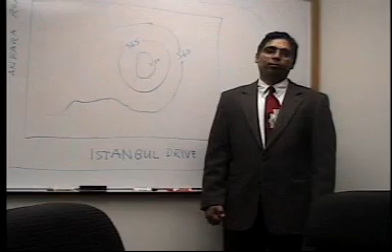Mustafa and myself, we work here at Winkelmann and Associates. The type of work we do here is called land development or general civil engineering. From the name, you can get an idea what kind of work we do. Land development means we develop a land from its existing condition to a desired condition.

The existing condition may be a farmland, a ranch, or an agricultural land, and we transfer this land to the desired condition—meaning the way you want to change it, maybe for housing, a retail store, or a big mall, whatever it is. General civil engineering means all branches of civil engineering are involved here, like transportation engineering, water resource and hydrology, soil and foundation, environmental engineering, and a little bit of structural engineering.

So I'll give you an example of the way we do the work here. There are two steps: one is engineering and one is legal. The legal part involves all the city permissions and permits from the city and TxDOT, which means Texas Department of Transportation, and others. For today's presentation, because it's such a short period of time, I'll cover only the engineering part, and moreover, only for single family. Sometime later, I wish I could explain the others to you.

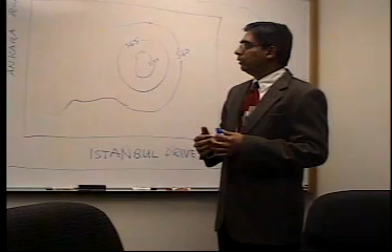And this is the existing contours, which shows 570, 65, and 60—that means there's a little bit high here and it's going down. There's street to street and there's a creek behind this property. It's a very simple property; I'm just using this as an example.

In my presentation, it's not very formal—it's more of an informal style. And if you have any question, Mustafa is with you, so you can ask him and he can explain a little bit more if you don't understand anything.

First of all, what we do—I'll put a very easy, very simple layout. This is a street, so we put a street. Say we put a street here, something like that. It has a two-point exit, and then subdivide it like this.

That means this is one person's, one person's, one person's, and one person's lot. This is his lot. We divided this whole land into 1, 2, 3, 4, 5, 6, 7, 8, 9, 10, 11, 12, 13. So there was one property, now there are 13 properties.

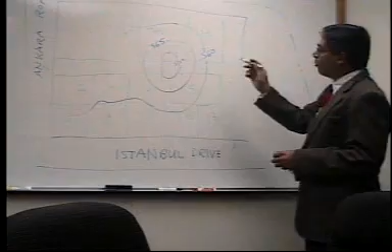So we need to design the street first, because in land development, the street is the backbone of the whole thing. If you cut a cross section from here, the cross section will look like this: this is 70, this is 70, and this is going down. This is the existing ground line. So we design it in such a way.

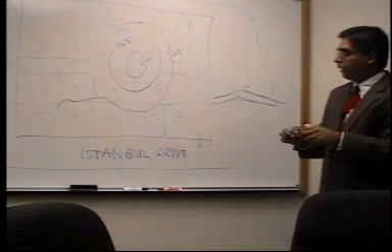We designed the street in such a way that it will cut the existing ground and put the dirt from the street to the pad, so the pad will be a little bit higher. The reason is, for drainage, we want all the water from the pad to go to the street—pad to street, pad to street—so that the street will work as a channel to convey the water eventually to either the creek or some other existing storm line. The storm and sanitary are two different systems. Both pipes carry water, but one carries storm water and one carries sanitary water.

So we profile it in such a way—it's called geometric design of this road. So I told you all the branches of civil engineering are involved; there's a transportation part, and we designed this.

So now from this street grade, the proposed grade, we put our spot elevations here, here, here, everywhere. Then from this street we put this spot elevation, meaning the elevation from the proposed grade, and we do the lot grading.

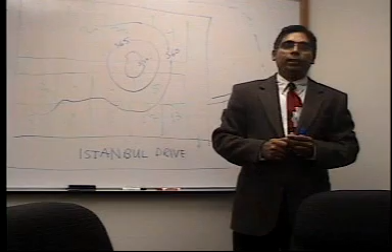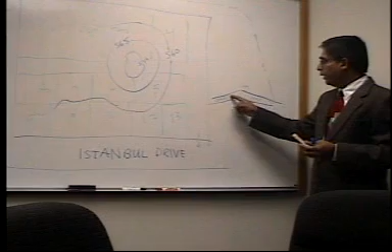What's the maximum grade we can design for the street, and the minimum slope? Very good question. Here in Dallas, we use minimum 0.5% and maximum 10%. But normally 10% is very steep, so we don't try to use that. Normally we use 2 to 3% slope, because if it's too steep it's not convenient for drivers, and if the slope is too little, water will not drain. So we keep it less than 10% and more than 0.5%.

So after profiling, we go for lot grading. Mustafa will explain lot grading in detail later, because I don't want to go too far into it right now. I'll just explain the overall idea.

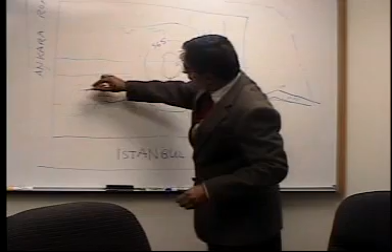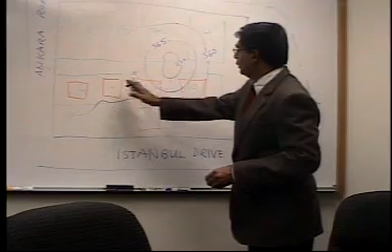This is a lot, but nobody can build a house in the whole lot. There is a setback area called the pad. The pad means the area of the lot where people can build a house, because they need a front setback, side setback, and back setback. I told you before I'm only covering single family detached residential houses, not townhomes or multifamily apartments or multi-story houses today. I'm just covering single family.

So this is a pad. We design the elevation from the pad based on the street grade - we know this elevation, this elevation, this elevation. We design it so that this person's water will not go to that person's lot, and we want to drain everything to the street.

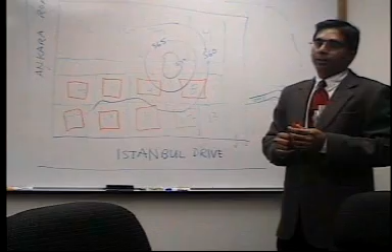You mean storm water? Yes, I'm talking about storm water first. After 10-15 minutes on storm water, I'll go to drinking water and sanitary water. This is all about storm water because we spend most of our time on storm water design. The reason we don't spend much time on the sanitary and water systems, I'll explain, but the storm water will flow here, here, here, here.

Then how does this water get carried to the street? Because if we cut a cross section of the street - I'm talking about concrete street or rigid pavement - that means it has a curb. There are two types of street: one is rigid and one is flexible. I'm talking about the rigid pavement, the concrete street.

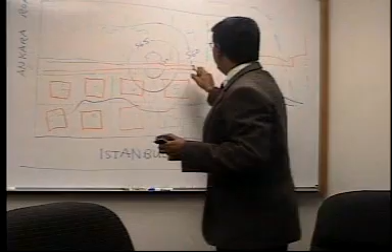This is your pavement, and this is your right of way. Mustafa will explain what right of way means here. This is your right of way, and this is your pavement. So water will come to the pavement and will be carried within this area.

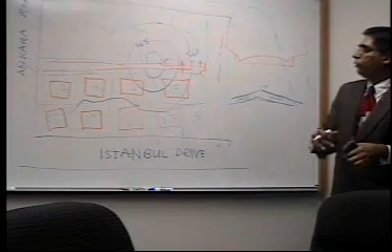Then, when the capacity of the street exceeds its limit, we need to put an inlet. Inlet means these little inlets we'll put in. We'll put inlets and carry the pipe. Inlets will carry the pipe like this, and we can drain to the creek.

So water will come from the house to the street, will be carried through the inlets, and there's a storm pipe which goes to the creek. How to design the inlet and the whole pipe system - I'll give you very short information because I cannot explain it fully, it's very big and vast.

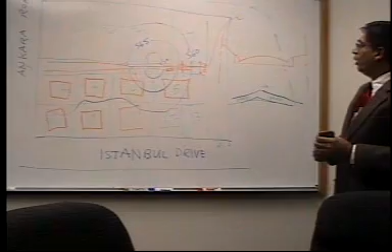There are a couple of ways to calculate the size of the inlet. Inlets can be 5 foot, 6 foot, 8 foot, or 10 foot wide. The opening of the inlet looks like this - if you see it from this view, there's the opening, a 6-inch opening, and this is your curb. That's the street, and the water will go here.

Mustafa can explain the details of what the inlet is. You can explain, Mustafa - or you can show them pictures.

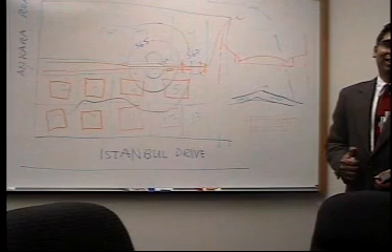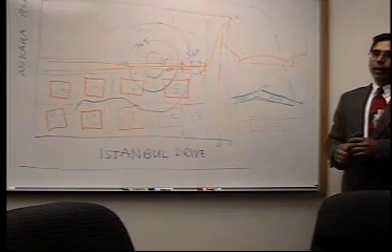So the water will go there and into the inlets. The inlet is connected to the pipe. This pipe runs and carries the water. How can you calculate the inlet size? A couple of ways - there's a nomograph. You can calculate it based on the slope of the street, since it depends on the slope of the street.

The size of the inlet depends on the slope of the street. If it's a very steep slope, then very little water will go to the inlet—most of the water will flow over the street. So one way you can calculate the inlet size is

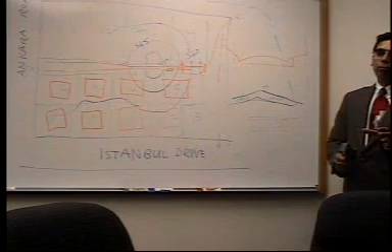through the nomograph. Number two, you can use some equations. That is, if the slope of the street is this, then for per CFS of water—CFS means cubic feet per second—you have to use that size of the inlet.

And for the pipe, we use the Manning's equation, which is one of the equations we use most. I think you all know Manning's equation: Q equals 1.486 over N, A, R to the 2/3, S to the half. That is the Q.

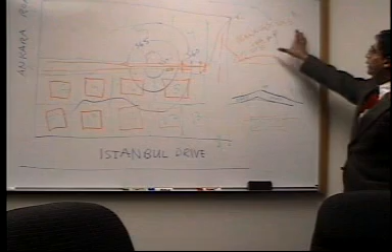Q means the discharge. We use a couple of software packages to calculate all of this, but all of the software depends on this equation. N is the Manning's coefficient, A is the area of the pipe, R is the hydraulic radius, and S is the slope of the pipe. We use this for open channel and for pipe systems both.

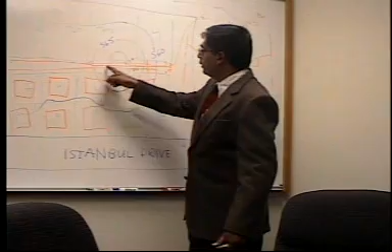So with this equation, we calculate the size of the pipe—how much Q is coming here. Say 5 CFS of water is coming here, then 10 CFS is here, so 15 CFS is coming here.

Now I'll go a little bit into the pipe design. So what we'll do here—say this point is called the head wall, that means the exit point, and this is your pipe, that is your inlet. This inlet is somewhere else here. So from this inlet 5 CFS of water is coming, and here is 15 CFS.

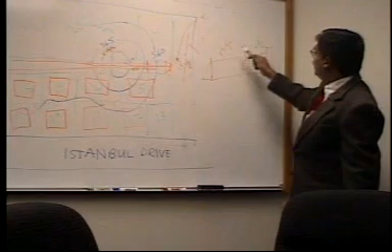And the main thing in designing the pipe is backflow analysis—that is very, very important. Water from the creek should not come out through the inlet. That means we have to do backflow analysis every time. The most important thing in sizing is doing backflow analysis so that water will not come out from the inlets. How we do that—I'll give you a little idea—is using the 100-year flood.

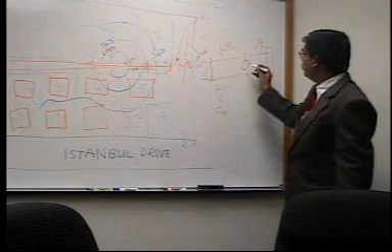What is the 100-year flood elevation? We know, say, 550. So again, from the Manning's equation, if we know the Q, we know the velocity and the slope of the hydraulic grade line. So we start from the 100-year flood here, then we go along this length with this slope, we get this hydraulic grade line, and then there's a jump because the velocity is more than here.

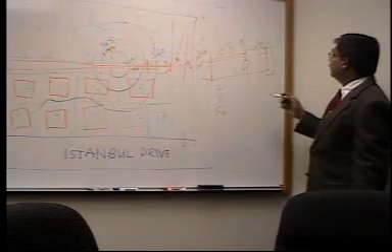So we plot the hydraulic grade line from this point to this, then this, then this. But this hydraulic grade line cannot be more than—it should be 2 feet below the existing pavement or top of curb. Otherwise, water will come out from the inlet and come to the street, and eventually it goes to the bed.

Again, I'm telling you, it's a very short time—I just gave a little bit of idea about that. Is there anything else, Mustafa, I need to tell?

What's the maximum slope and minimum slope for the pipe? Okay, very good question.

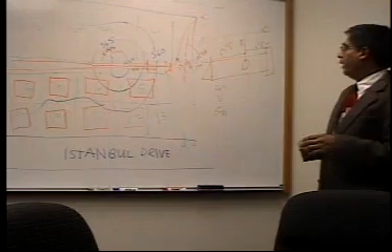It depends on the size of the pipe. If you have a very big size pipe—the minimum size of pipe we use here is 18-inch RCP. 18-inch RCP is reinforced concrete pipe, and maximum we use here in our office, as common practice, is 66-inch RCP. Then we go to the box—box means concrete box, a big box, it can be 10 by 10, whatever the size.

So the bigger your pipe size, the less slope you can use. You can even go sometimes to 0.02%, maybe 0.1%. For an 18-inch pipe, I will not use less than 0.5% slope.

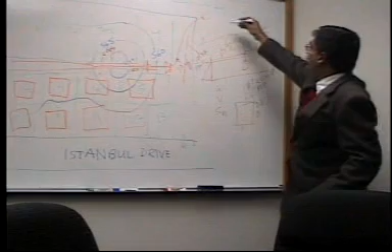But if it's partial flow, only in that case is slope an issue. If you are in a full flow condition, that means your pipe is under pressure—in that case, your slope doesn't matter because you are eventually at full flow. When you are at full flow, your velocity will not follow the Manning's equation; instead V equals Q divided by A, that means discharge divided by area of the pipe. In that case, there is no slope term.

So as long as you are in partial flow, you have to think about the slope of the pipe, because more slope means you can get more discharge.

But in your full flow condition, your pipe slope doesn't matter. What's the material we can use? We can use different kinds of materials. We can use RCP, reinforced concrete pipe. We can use PVC, which is polyvinyl chloride, PVC pipe. We can use CMP, corrugated metal pipe, and we can use ductile iron. We can use different varieties, but the common practice is to use reinforced concrete pipe. It's very common here. You can use varieties of stuff.

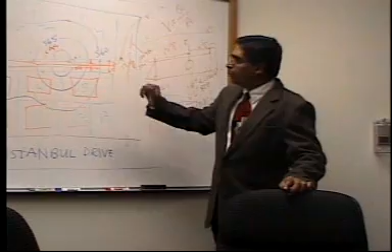So, yes. Okay, are we going to talk about the sanitary? Yeah, so they get a little bit of an idea about the paving, a little bit of an idea about the storm. Do you think I should tell anything more about the paving? I think that's enough for a short time. Oh yeah, that's enough for sure. Okay, good. Now I'll go to the sanitary. Very interesting.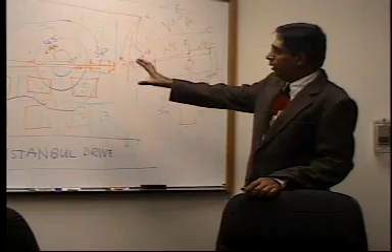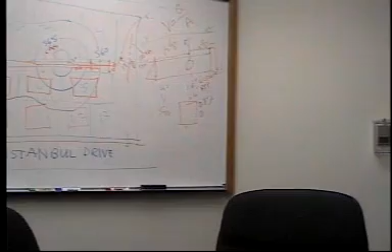When the city, say this city, already has their master plan, on their master plan they have the population calculation, what the population will be after 20 years or something. I'm talking now about the sanitary, then I'll go to the water. So they design their master plan, and on the master plan they already have sanitary here. The big pipes, this pipe may be 16 inch or whatever it is. It's a very big pipe.

This is done by the city, and when we connect our sewer line, if it's very little, like 10, 20, 30 houses, we don't need to calculate anything, because we know this pipe has the capacity to carry the sanitary sewer generated from here. Normally we use 8-inch PVC, sometimes 6-inch PVC for sanitary sewer if there's very little population.

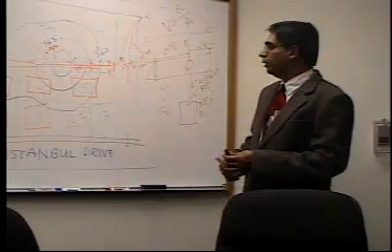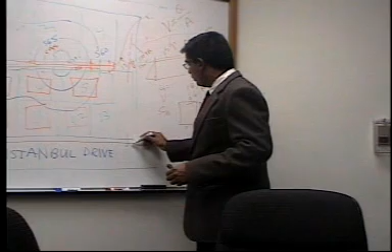Now we put the storm line here, we put the sanitary line. Some cities say within the pavement, some say not within the pavement, between the pavement and the right of way. Wherever we put the sanitary, it comes like that and goes like this, and eventually it connects with the manhole. We have to put manholes wherever the pipe changes direction, or every 500 feet. Some cities say 500, some say 400 feet.

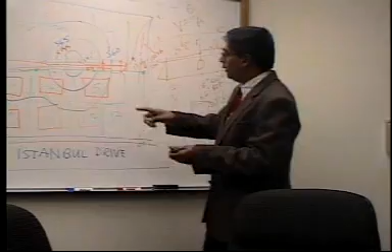So you put the pipe and you put the manholes whenever it changes direction. I think this is a high point, so we can put it like this. This house will be connected here. This sewer will go this direction, this sewer will go that direction. As I told you, if it's a very small area, we don't need to calculate anything. We can use 8-inch PVC pipe and a couple of manholes and connect directly with the existing city sewer line.

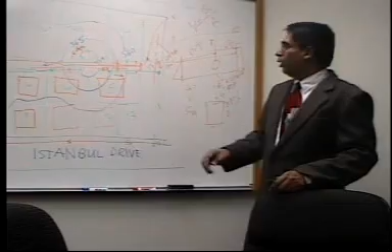But if the city doesn't have this line already, or your development is such a big development that you cannot put an 8-inch sewer line and connect here, you have to do some calculation. The way we do it: say per capita 100 gallons per day per person, and each house has 3.5 people. So 100 times 3.5, 100 gallons per day, GPD, per person.

Then we have peak factors. Peak factor means at a certain period of the day the demand is very high. It depends on the city, the culture, the country. If everybody goes to the bathroom for a shower at the same time, in a very short time, there's a peak. Some cities say 5: with less population, you have to use a peak factor of 5. So 350 multiplied by 5.

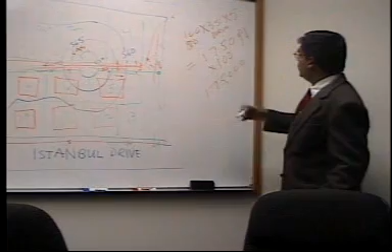Is that correct, Mustafa? Looks like it. Gallons per day. So 1,750 gallons per day per house. If you have 50 houses, multiply by 50. Or say you have 100 houses, so 175,000 gallons per day.

Then one more thing you have to add, that is infiltration, because your sewer line goes like this and you have manholes, and manholes are not watertight. Does this calculation cover the grass and garden?

Oh, you're talking about the water from the garden? Yes. Watering the garden? Yes. Okay. The water from the garden will not go to sanitary. This will go to the street. When this guy puts the water on his garden, this water will go to the street, and from the street it will go to the inlet, and from the inlet will go to the pipe and go to the creek.

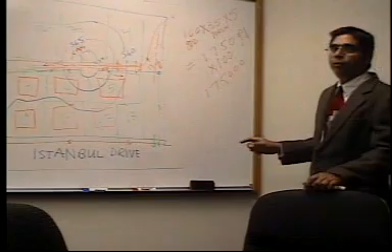But here, one water we miss is that if it rains, the inlets and all the manholes are not watertight. So when it rains, some water goes through the manholes, and all the connections, the PVC connections, the pipe, like this pipe you connect here, then this pipe you connect here, the connections are not 100% watertight. So some water will go through that connection. So you have to add this plus infiltration.

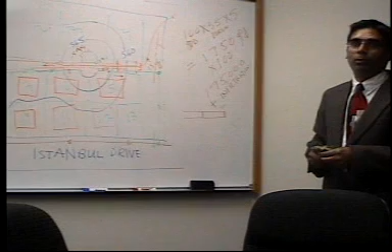It depends how the city calculates that. Each and every city has like per acre this much or per mile this much, so you add this all, that is your total Q for this population, for 100 houses. Then again you use the Manning's equation, what I told you already, 1.486 divided by n, A R^(2/3) S^(1/2). You put that in, you get the size of the pipe. So that's the way you can calculate the size of the pipe in the sanitary sewer.

Okay. Is there anything on sanitary sewer, Mustafa? On sanitary, I think you mentioned all of what I'm prepared for. Okay. Yeah. If you have any question, you can ask Mustafa, he can answer. He does all these layouts and design.

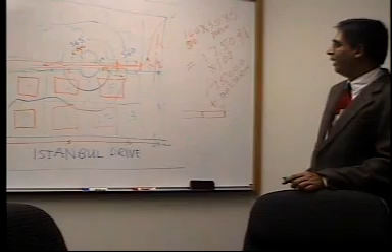So we put the manholes, and sometimes we put the cleanout. Normally we use PVC. Some cities say no. If you have a pipe very close to sanitary and storm, then sometimes the city says you have to put some kind of encasement, concrete encasement. Sometimes we put ductile iron pipe if you don't have enough cover. So I think that's all, right, Mustafa, on the sanitary?

Yeah. For storm, I would like to ask about the pond. Why do we need a pond? Oh, okay, sure. So I'll stop here on the sanitary. Mustafa has a question on storm: why we need the pond. There's a couple of reasons we need the pond.

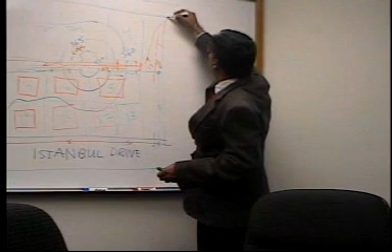Say you have one existing, well, okay, say this is a creek, don't worry about this creek, this is a creek, and this is a road. Think in this way, okay? So you have an already existing pipe here. Now this is no more creek, it is a street now. Okay, so this pipe is already built, and it has a certain capacity. It cannot handle all the water you will generate going there.

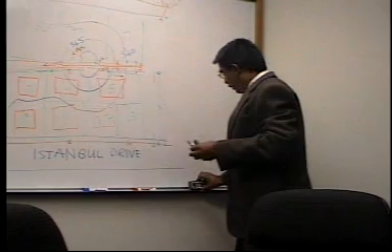So the easy way, whatever water you are generating here, I'm talking about the storm water, not the sanitary water. Sanitary water is done. So whatever storm water is generating here, this pipe doesn't have the capacity, so we have to detain the water here somewhere else. Detain the water means you will keep the water here, and release it at a smaller rate.

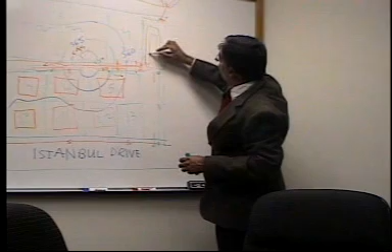You cut the pond like this, so it has a certain volume. So you detain the water and then you release it at a certain rate. And the way we calculate this one is called the modified rational method.

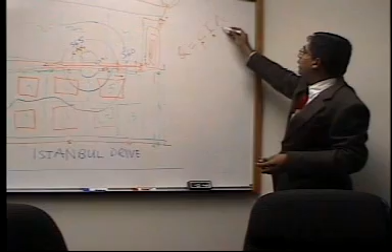Yeah, one thing I forgot to tell you, how we calculate the storm water is the rational method, which is Q equals CIA, which everybody uses. C is the factor, depends on the soil type and vegetation. I is the rainfall intensity, and A is the area. So to calculate how much water is coming here, we divide the area into small catchment areas, and that gives us the Q, peak Q, the water coming here. I forgot to tell, okay.

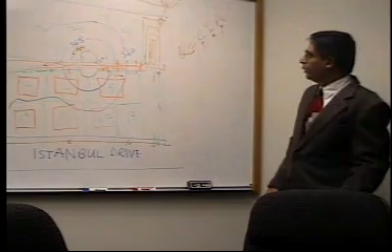Same thing, for how much water is coming to this inlet, we draw a small drainage area map. From there, we calculate how much water is coming to each inlet. So to answer your question on the pond, we detain the water to release it at a small rate.

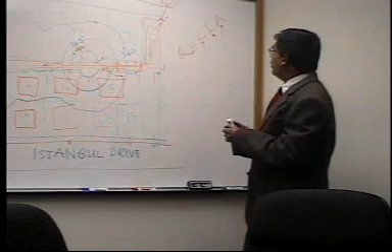Number one. And number two, sometimes the undeveloped condition has less surface flow because most of the water goes down, because C is very low, maybe 0.3 or 0.2 or 0.35. But when you build this, C goes higher, maybe 0.6 or 0.9, so you have more surface water. But sometimes the city says, no, you cannot drain more water, you have to drain only the undeveloped flow. In that case, you have to build a pond too.

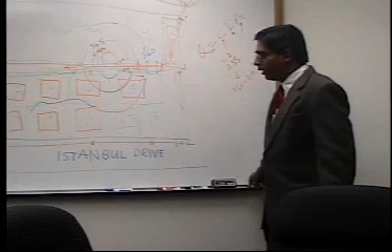Okay, now I'll cover how we design the drinking water. Again, there are a couple of ways. Number one, the city has already put the drinking water line in the master plan, maybe a big size pipe, 48 inch or a couple of 60 inch or more than that. So they already have the drinking water line here, maybe here. If it's a small development, then we don't need to calculate anything. We just connect with this line and this line.

But here, the very important thing is you have to put fire hydrants. This is our pavement. This is your water line, it comes here, goes here, meets here. So you have to put your fire hydrant, depending again, every 500 or 400 foot. Okay. So that in case of fire, they can open the lid, connect the connection, and then that's used for fire prevention.

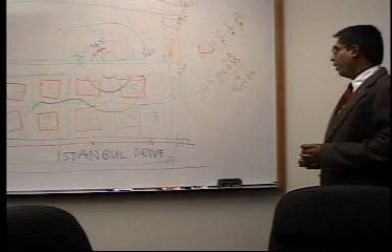But if it's a big development, again like sanitary, then we have to think how to calculate this. In this case, Mustafa, we use 100 gallons per day for the wastewater, and for drinking water we use 245 gallons per day. I'm talking about one city; some cities may be different. And then same thing, 3.5 per house, and there is a peak factor.

There is a maximum day demand and a maximum hour demand. Maximum day demand is the average multiplied by 2.5. That means on a certain day, a certain period of the day is the maximum day, and you multiply that by 2, which is the maximum hour demand. And we design the pipe with the maximum hour demand.

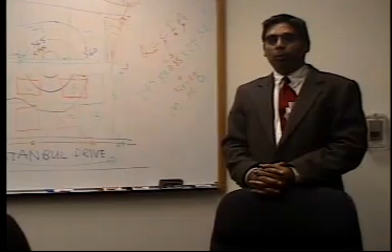And I can tell you a couple of cities have different kinds of models, and you have to run the model. When you run the model, you run it with the maximum hour demand, number one. Then you run the model such that the losses in the pipe are not more than, I think, 20 feet or something. Just give me 1 second.

Okay, so each and every city has their own criteria, but you should have enough pressure on the pipe so that the fire hydrant has enough pressure, in case of fire it can be used. So your pipe needs to be designed so that each and every node has enough pressure. Node means each and every connection. In the computer, you run the model and then see.

Other than that, I think it's pretty simple. If you don't have to run the model, if it's a small development, just connect 6-inch or 8-inch, normally 8-inch PVC, to the existing water line, and you're good to go.

I always wonder, we are always designing water, sewer, and storm, but we didn't design natural gas. How do they get natural gas? How are they connected? Okay, very interesting. There are two types of utilities: wet utilities and dry utilities. Wet utilities are water, sewer, or storm. And dry utilities are phone, gas, and electricity.

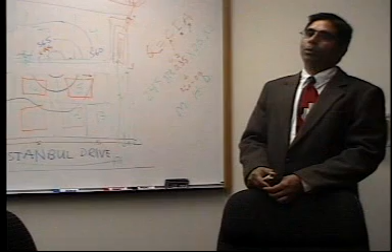We normally don't design those in our office, that's correct. The gas company has their own design engineer, and our general contractor cannot connect their pipe. They have their own contractor and their own design. Does that mean after the contractor develops the site, they come and dig the site and build? What's their process?

Okay, I'll tell you. They put all these utilities first, and at the same time they put some sleeves under the pavement. Some sleeves here, sleeves here, sleeves here. And I did not mention anything about the plat. Probably Mustafa can give you some idea about plats.

During the process, when we design, we send our drawing to the electric company, gas company, and even the cable company and phone company. We send everybody our drawing, and they design in-house. And what they need from us is the easements. You can explain easements in detail. So when we are done, they still have the easement to put their line.

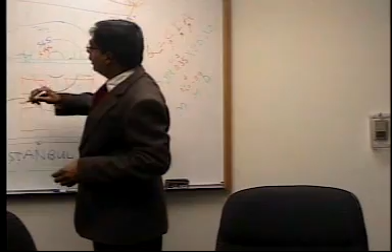No, normally they don't run under the pavement. Okay. That's the reason there's the right of way. The right of way means this is the area. At the beginning, I'll tell you one thing, that this development is private development, but one time the city will accept this one, and the city will maintain the paving, water and sewer. It's public property. So the right of way means, although the pavement is here, this is the whole area that will be public.

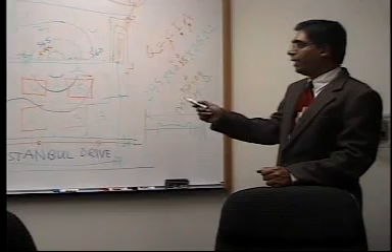This will never be public because this is this guy's property. But this right of way is the city's, and all the dry utilities will go here. I understand. So they will put that after. That's the reason when we design, we don't put sidewalk. Builder puts the sidewalk. Because if we put the sidewalk, and if those franchise guys come, they need to tear off the sidewalk. So the developer doesn't put the sidewalk in front of the house. The builder puts the sidewalk.

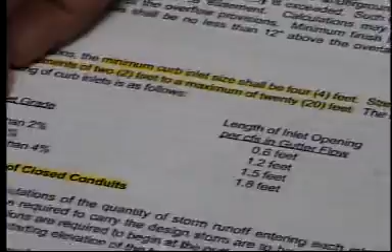I can show you the street grade and the length of the opening per CFS, that means feet cube per second, of gutter flow. I think in the metric system it can be meter cube per second or something. So street grade, if it's in the sag, then your inlet size is 0.6 feet per CFS. So if the street is in the sag and you have 10 CFS water to the inlet, the size of the inlet, that means the opening of the inlet, will be 6 feet.

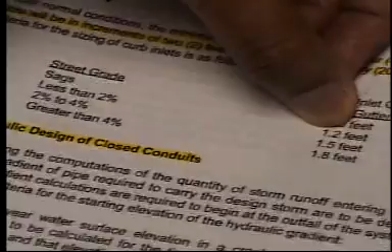Same thing, if the street has a slope less than 2%, then if you have 10 CFS water, you need the opening 12 feet, because it's 1.2 feet. If your slope is 2 to 4%, then if you have 10 CFS water, your size of the inlet needs to be 15 foot. If your slope is greater than 4% of the street, then if you have 10 CFS water, you need the opening 18 feet. Okay, that's one way.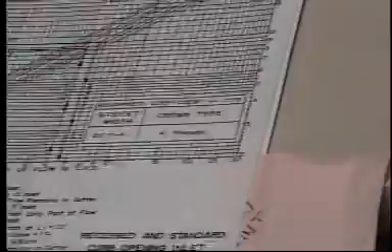Then what you can do, if you put a 15 foot inlet, because some cities say you can use only 5, 10 and 15 foot inlets. Some cities say you can use 10, 12, 14, 16. So whatever the city's criteria, if you need to put 15 foot, then you go to 15 foot and go to that 3% slope. That means the inlet capacity is more than 6. That's the way you can do that if the inlet is on grade.

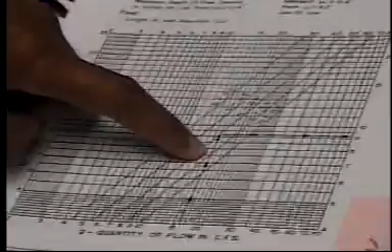But if the inlet is in the sag, so in the low point, then there's a lot of different kinds of nomographs you need to use to calculate the size of the inlet. If you have like 15 CFS of water, and you have ponding depth, that means how much water you allow in the street. Say you want 0.5 foot, meaning the 6-inch curb of the street. So if you use 15 CFS water and a ponding depth of 0.5 feet, then you need a size of 8 feet. An 8 feet opening inlet can carry 15 CFS water, which allows 0.5 feet, that means 6-inch curb height. So there are other ways, but these are the two easiest ways to calculate the inlet.